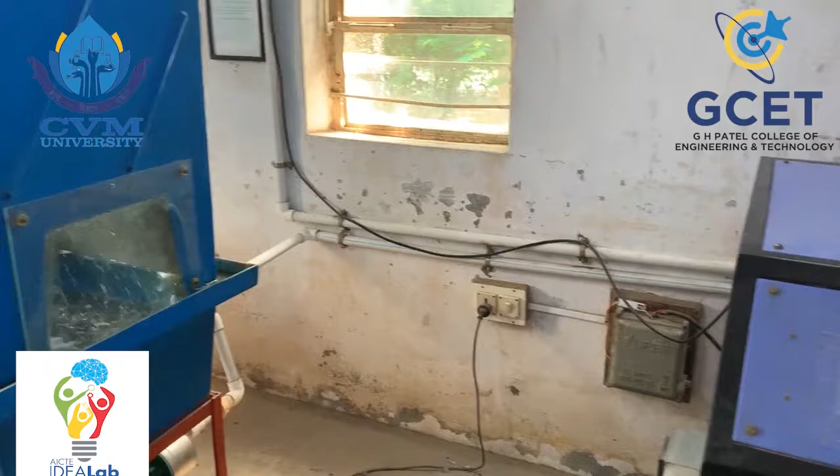Hello, welcome everyone. Today we are going to perform a fluidity test of aluminum.

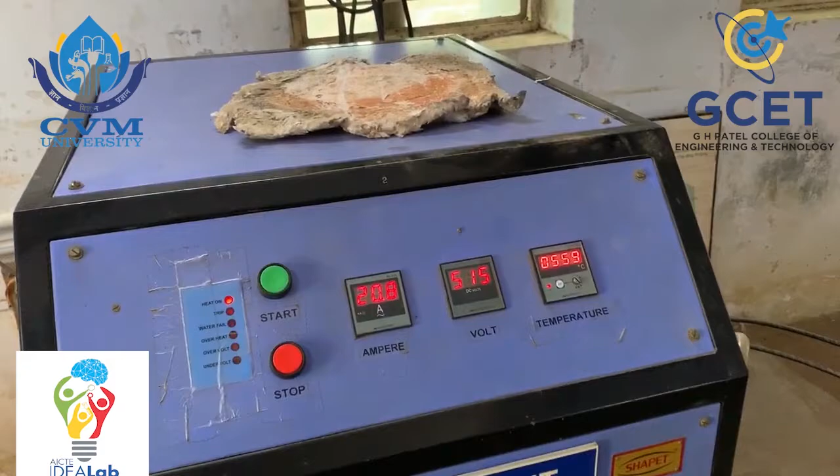So now we'll see the setup. Now as you can see, this is the cooling tower of our induction furnace. Now this is the control unit of our induction furnace. In the control unit we can see the voltage, the ampere and the temperature. We can also make changes here.

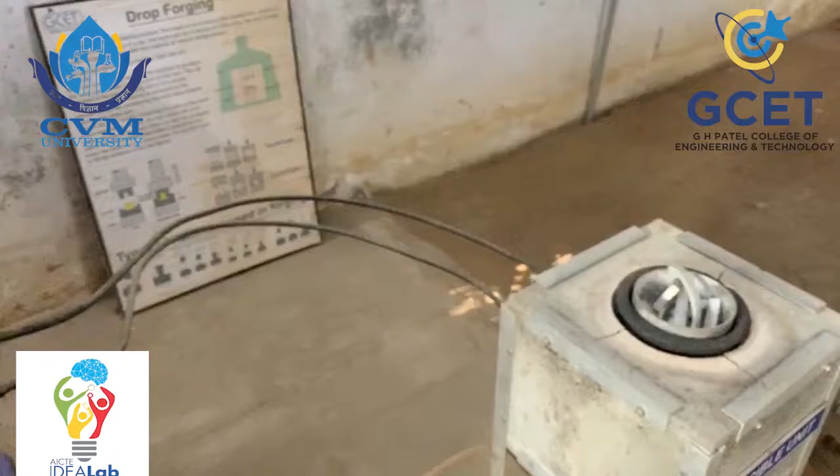Now we can see the crucible unit. Here we will melt the aluminum. Now here you will see the two connections from behind. This is the connection of water coming from the cooling tower. This will work continuously. After we stop the induction furnace, this keeps on working for 3 to 4 hours for cooling the furnace.

Here we see the molten aluminum, but we can also see that there is slag formation. So now we will remove the slag out of it.

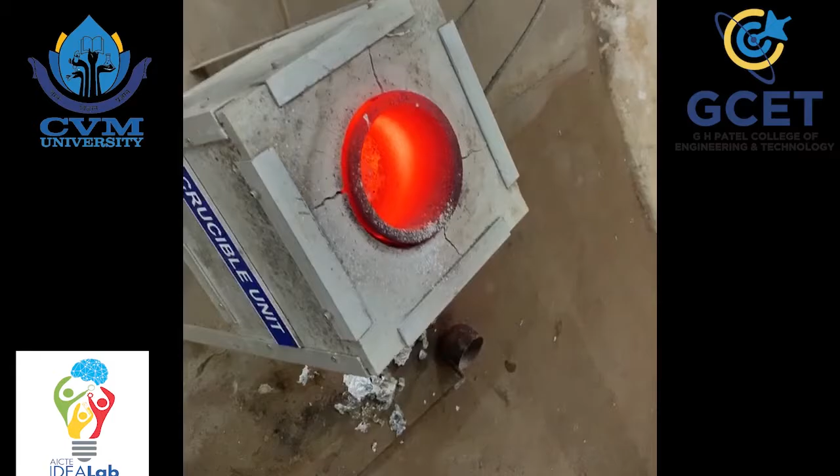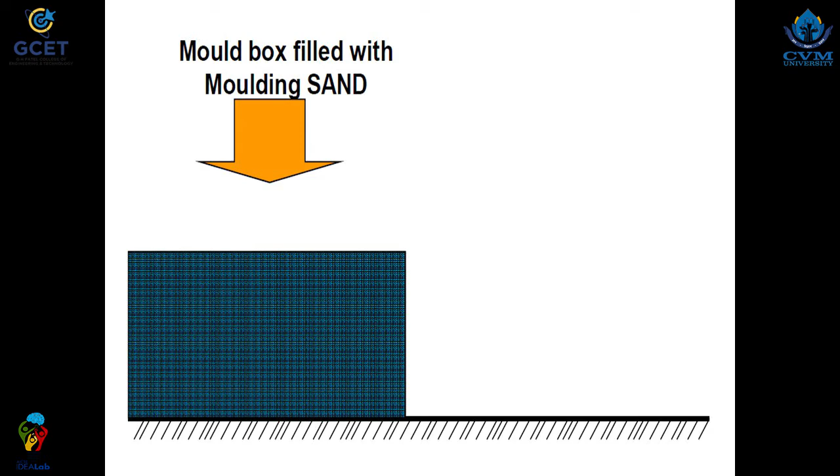Now we will quickly see how a mold is prepared in which pouring has to be done. In our first step, we will put a pattern on the board and it is covered with the help of a mold box. We will sprinkle sand over it. After sprinkling sand, we will do ramming with the help of a rammer. After completing ramming, if it is not completely packed, then again we will sprinkle sand over it and again we

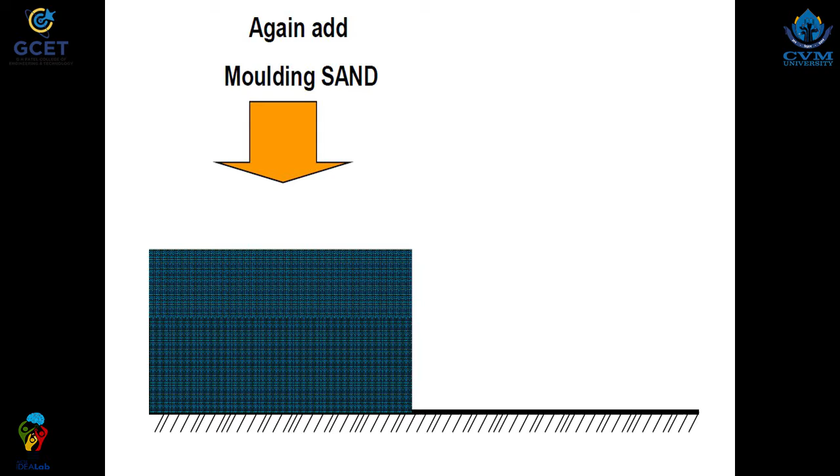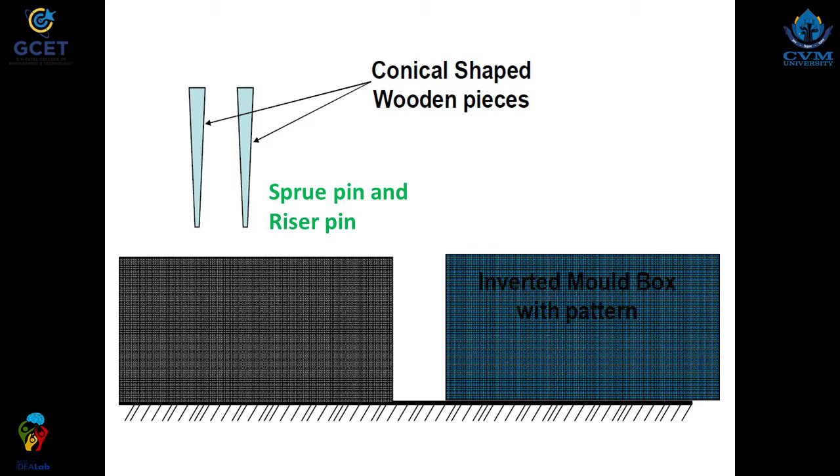will perform ramming. We will invert our mold box and prepare the second part of the mold, which is also known as the cope part. Now we will put a conical pin for the sprue and then we will put a second conical pin for the riser. We will perform the same step that we followed before, that is putting sand and ramming.

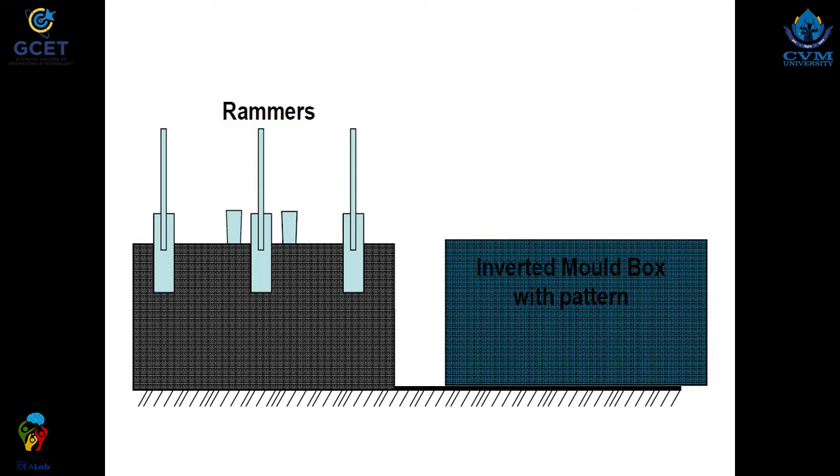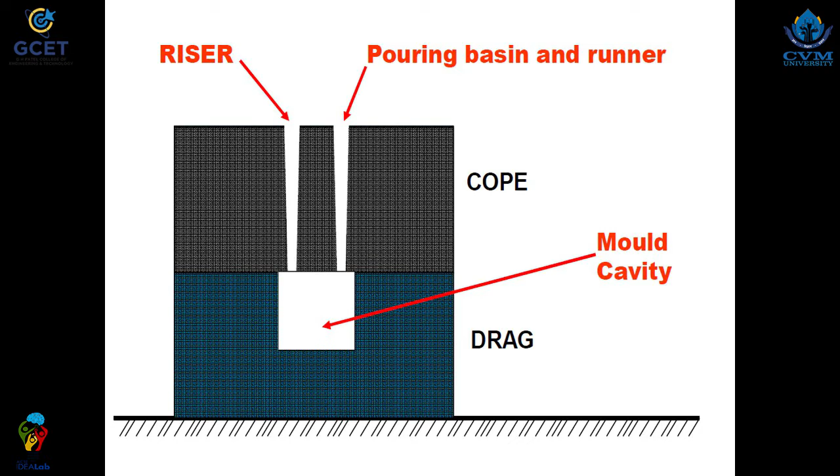Now after completing ramming, we will remove the pins and now we will take care and slowly align both the parts of the mold. Thus our mold is prepared and our mold finally will consist of a cavity in which the metal will solidify. There will be a riser and a pouring basin.

Now we will perform our first pouring and it will be at 725 degrees Celsius temperature.

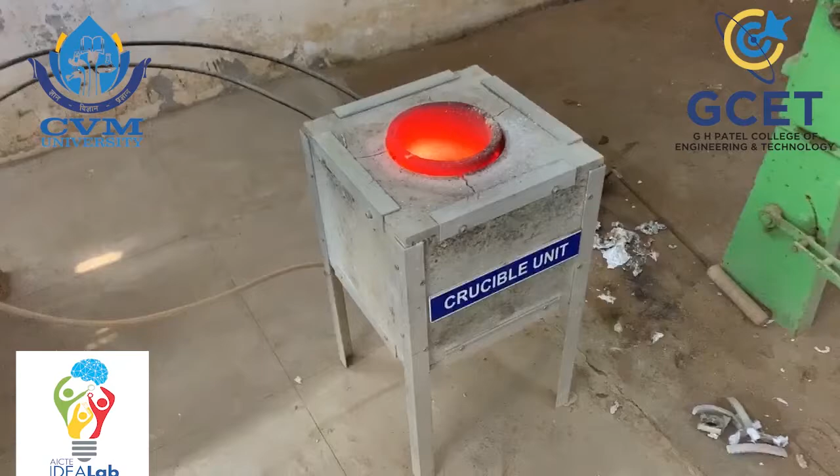We will do the second pouring at 756 degrees Celsius temperature.

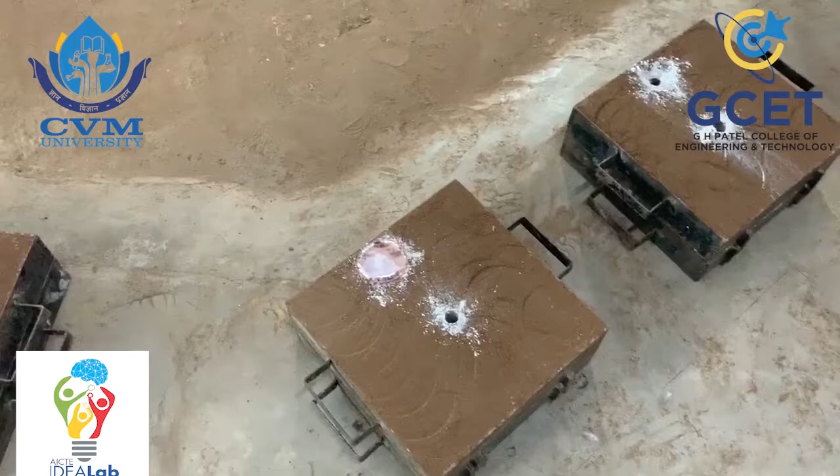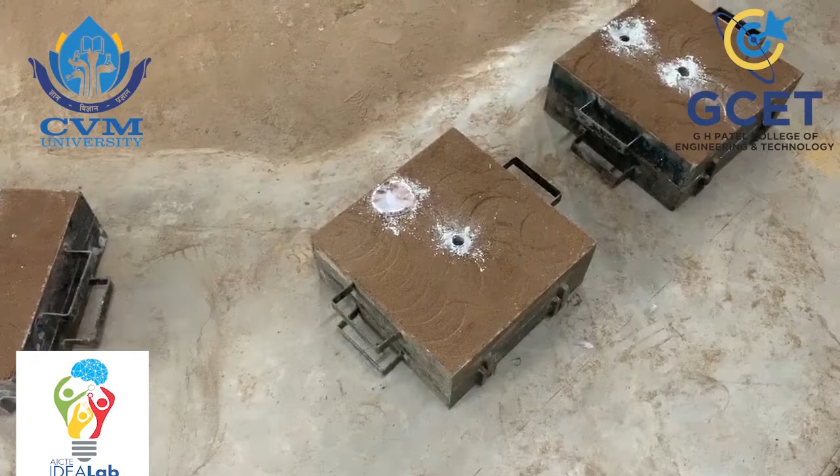Now we will perform the final pouring at 802 degrees Celsius temperature.

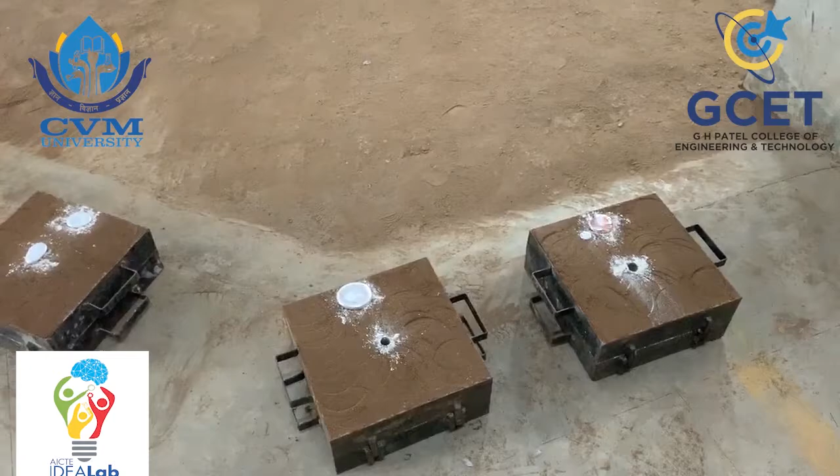Now we will break all our molds and take all the castings out of them.

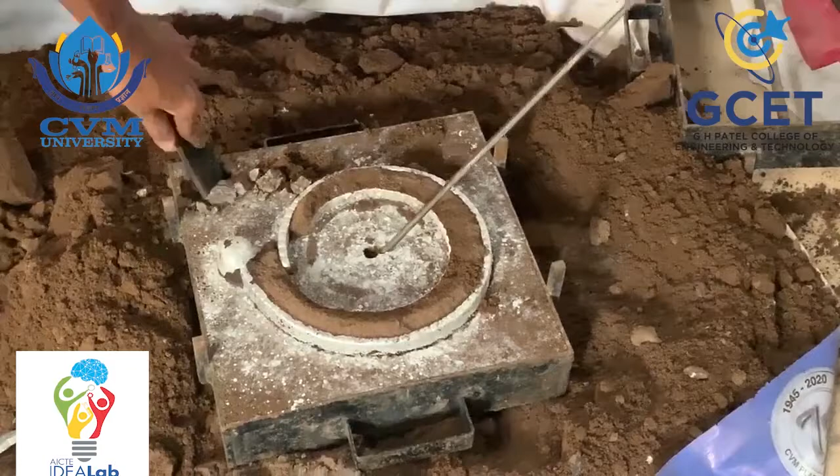This change is observed because of the fluidity. Now as we can see, the casting for 802 degrees Celsius temperature is long. So we can conclude that for higher temperature, the fluidity of the material is high.